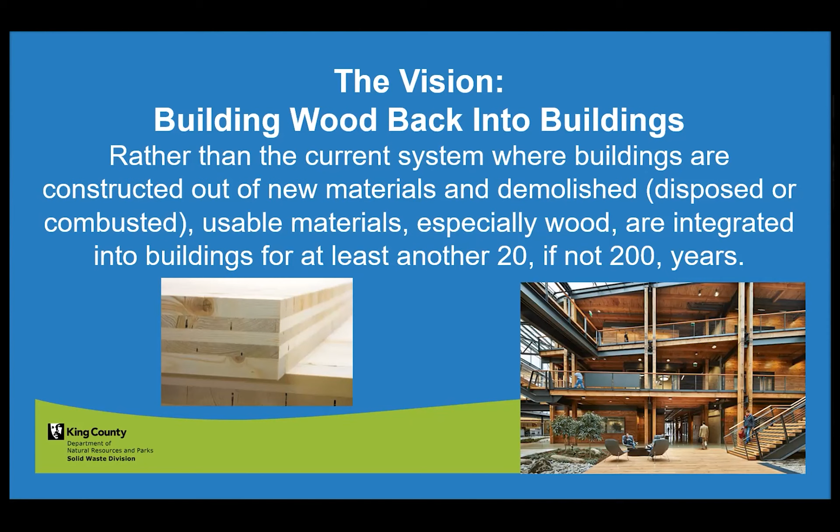But basically, once the buildings are deconstructed, the materials go on to basic processing. Then we'd go to a salvage lumber warehouse where they would go through a lot of different steps. I'll talk about that more in a few minutes too. Then get finger jointed. Then the material would go on as lam stock or finger jointed boards into manufacturing, get put into panels, and then go out for distribution and into new buildings.

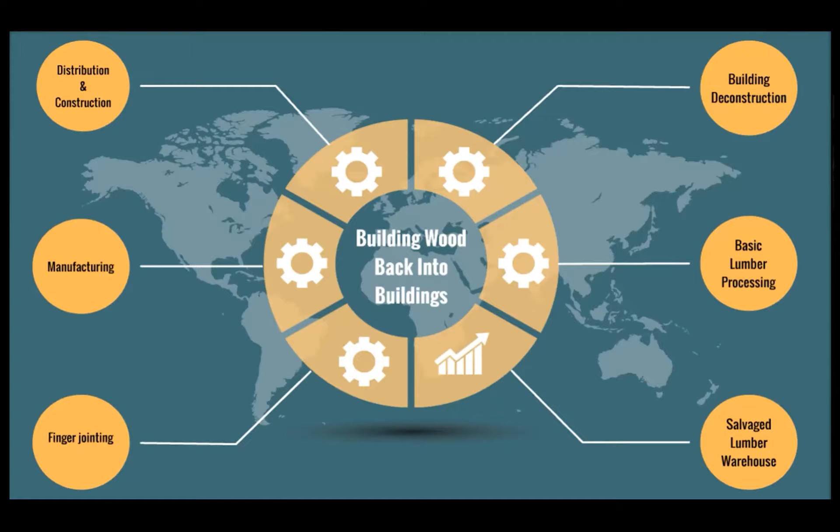So when you're looking at a building like this that has really large timbers in it, it's pretty easy for people to envision how this material could be reused. So we're not spending a whole lot of time focusing on this. There's warehousing issues, there's design issues, there's a number of issues that are wrapped up in reusing this material. But as we develop the larger system, we're allowing for warehousing space that would be needed to help get this material back into reuse and for additional guidance. So we're really working on tackling the tougher stuff that's out there.

We're going to be working with contractors and haulers also to be capturing this material further up the waste stream, so it's in larger pieces. But as a worst case scenario, this is what we're looking at. And even with these materials, we're looking at somewhere around 50 to 80% of the material could be captured for reuse and finger jointing into new material.

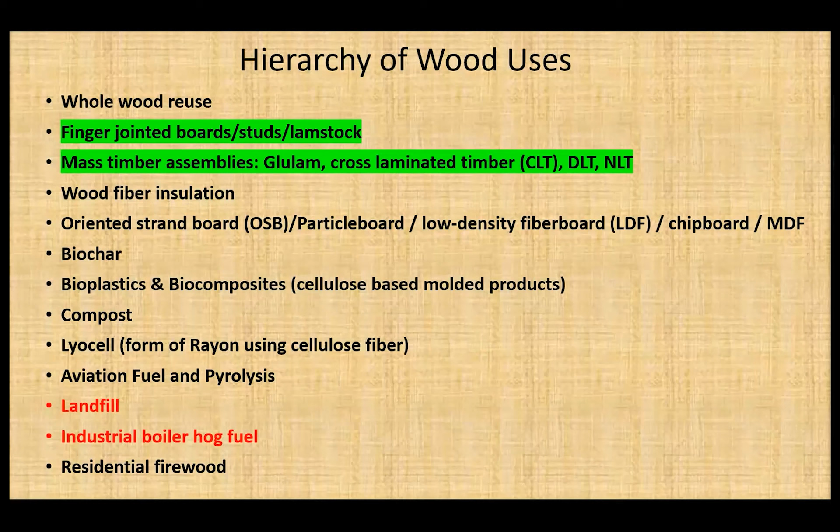So this just highlights the two areas we're focusing on in our hierarchy. And really, this is what we're trying to get to, right? So we're trying to figure out a way to take all those little pieces of boards and connect them in a way that they can be structural, that they can go into a building.

We can lock up that material for another 200 years, hopefully, if the building's designed well and designed to be adaptable. Brad talked about that a little bit. And then eventually, when this building's taken down, most estimates are roughly 70 to 80% or possibly more of the panels within this building could serve another life, being reused in another structure.

So a little bit more about the Salvage Lumber Warehouse. We're working on taking boards, sending them through an AI-assisted inline assessment and processing system. One of the big issues, and there's one question about it already, but one of the big issues with salvaging lumber is trying to get similar materials.

If you're taking down a bunch of buildings and you're taking the wood from those buildings and you're mixing it all together, you've got a lot of different, sometimes species. Around here, it's mostly Doug fir, but there's a lot of densities. That's the biggest issue. And a lot of different qualities, all right? So we might be getting some that's offcuts from new job sites. That's going to be significantly different in its properties than what's coming out of a 100-year-old house that Dave Bennink

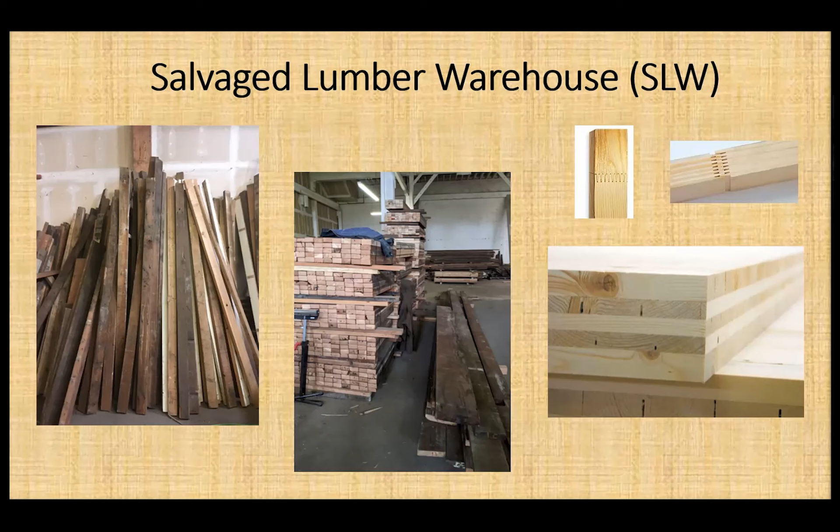helped take down. And so we need to have a facility that can assess that material and get it sorted according to the key properties. Densities and strength are the two main properties that we're going to be sorting for. And then materials would be batched together and would go on to various uses. So whole boards would be reused as studs as they are, but we know that a huge majority of the material is shorter than 8 feet. And those pieces would be getting cut, finger jointed, made into lam stock, and then sent on to various engineered

uses. So we see the Salvage Lumber Warehouse as part of a larger campus. We call it the Sustainable Wood Business Park. And there's a lot of different companies. Some already exist, some have expressed interest, and we know there's still others out there that we haven't found yet that would make a lot of sense to co-locate with the Salvage Lumber Warehouse.

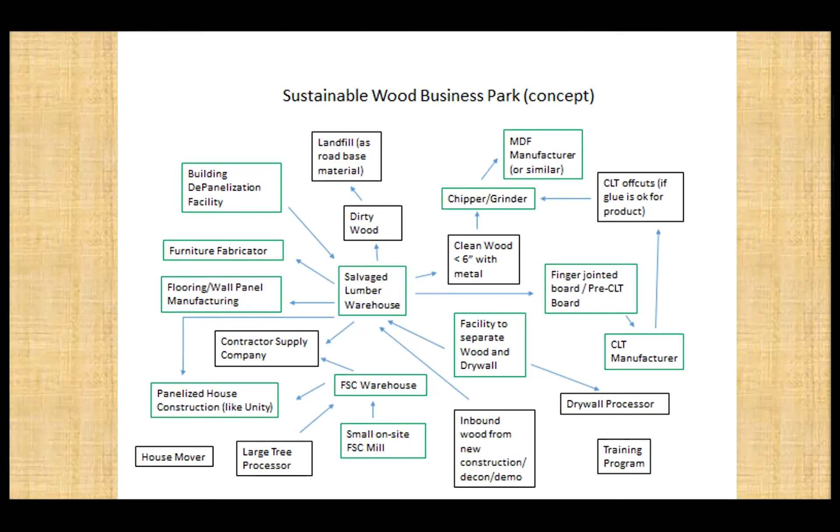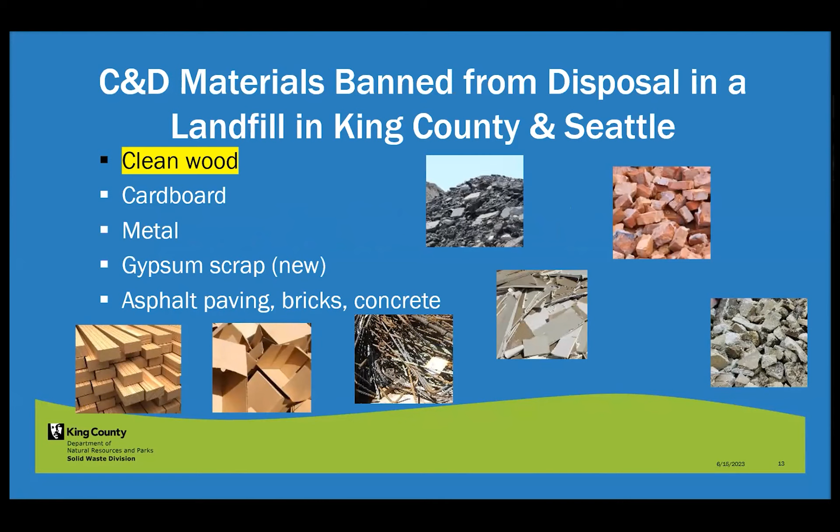How do we get there? Real quickly, King County banned clean wood from going into landfills. We've been working it into our policies. A couple of years ago we worked it into our strategic climate action plan. We have one line in there that says we're going to support the transition to a reusable wood market. We've been able to rely on that pretty heavily for helping move our efforts forward.

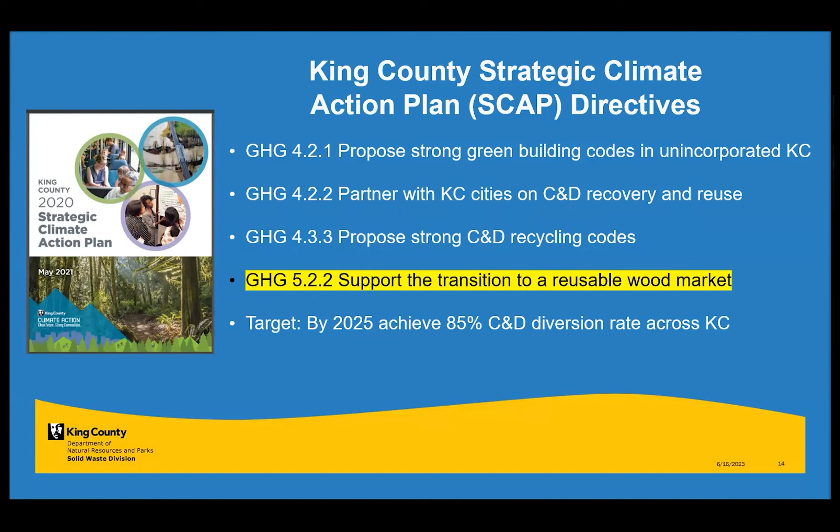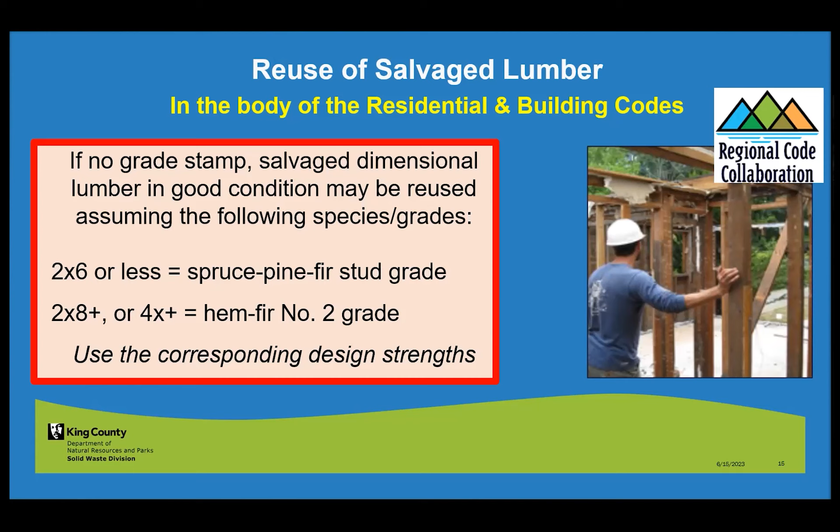At the state level, we worked with the state building code. It's now available in both the residential and commercial codes. It's referred to as used sawn lumber. I've got the code information on the next page I'll show you, but basically it states that if the material is 2x6 or less, it should be assumed to be spruce, pine, fir, and if it's 2x8 or 4x and larger, it can be assumed to be hem fir number 2 grade. And those are the assumed grades, so it does not have to have a grade stamp on it anymore.

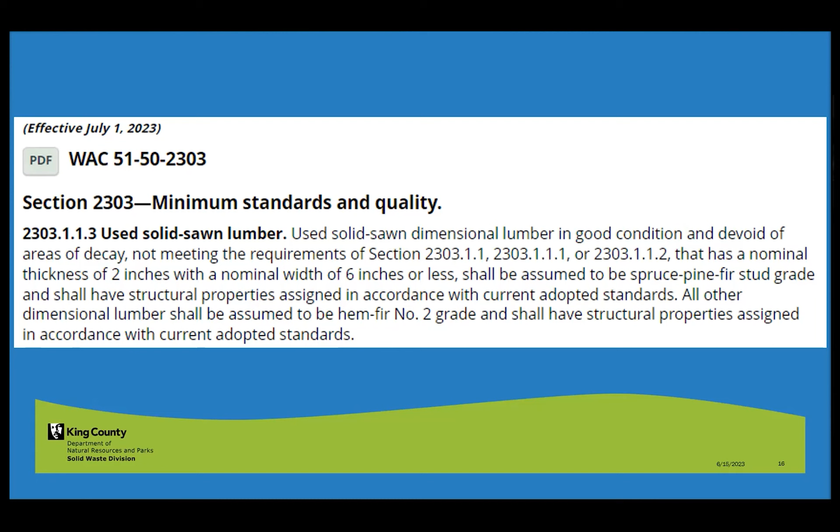I'll switch to this so you guys can write that number down if you want to capture the WAC for it. But basically, this makes it so that you no longer have to have a lumber grader come out and look at each and every individual stick of lumber. So it saves a lot of time and a lot of cost on projects.

We recently got into the state building code 2 appendices related to C&D, construction demolition materials. The key point for this industry is that they require the submission of a salvage assessment. So that's kind of the first step in getting people into the buildings, thinking about what's there that could be salvaged. It's not a huge step, but it's a first step. And as appendices, I should also note that these are available for individual jurisdictions to adopt. It's not a requirement, but they can say we want to adopt Appendix P and it becomes part of their code. So it's a jurisdiction by jurisdiction adoption at this point.

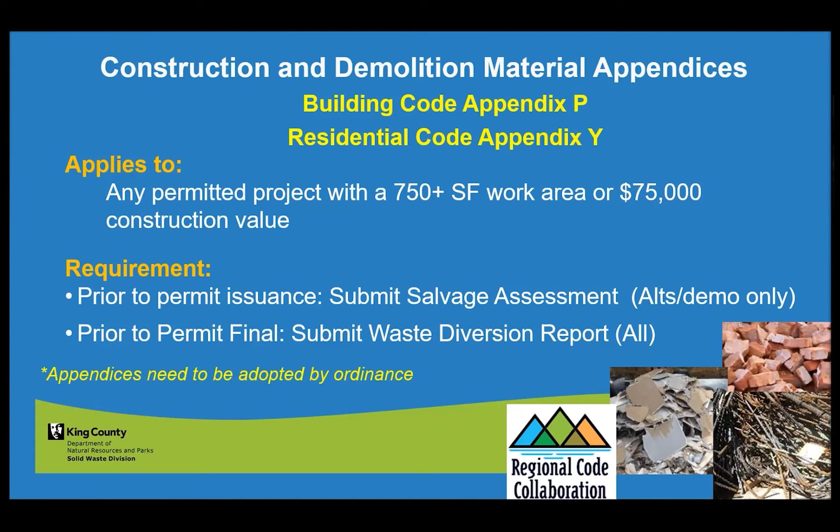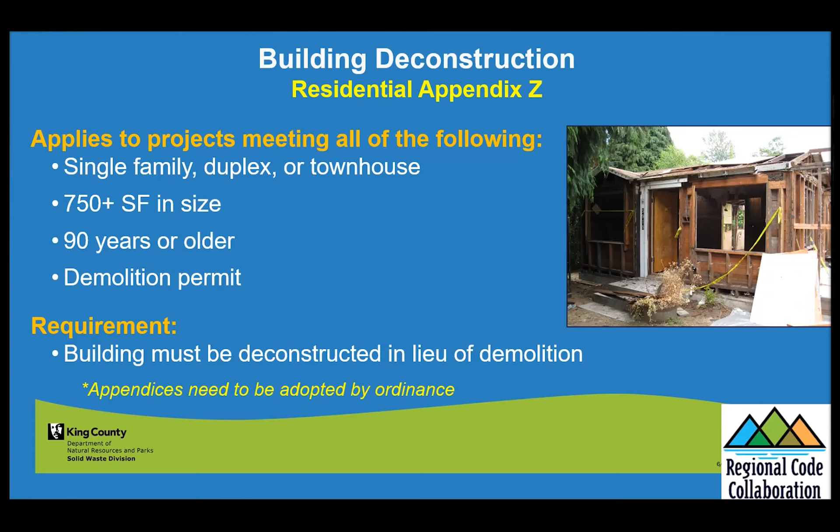Then we also have Appendix Z, which is also an elective code for jurisdictions. And this has to do with building deconstruction. If they decide to adopt this, it basically applies to single family homes larger than 750 square feet that are 90 years and older. They can request a waiver or a variance on that and make it fewer years. We have one city that's looking at making it 70 years. And basically it says the building has to be deconstructed instead of being demolished. So these are just a couple of ways that we're working on moving the industry forward, working to get that lumber out of buildings in a more usable fashion.

And our next step really is to find a location for the Salvage Lumber Warehouse. We've applied for a $4 million EPA grant. City of Seattle has done the same. For Salvage Lumber Warehouse, we're partnering on that. If Seattle gets their grant, King County can move forward, and if we get the grant, we can move forward with working more on the Sustainable Wood Business Park concept, the way we wrote it. But that's what we're working on the most at the moment.

I just wanted to leave you with these thoughts. These actually kind of are based on some ideas that Brad threw out there, but basically that we should recover the resources that we have, reuse these resources wisely, and then rethink how to design for the future, so that in the future, when we're recovering the resources and reusing the resources, they can get used for their highest and best use. And we won't have to put nearly as much energy and embodied carbon into processing that material to get it back into the cycle again.

And that's it for my presentation.